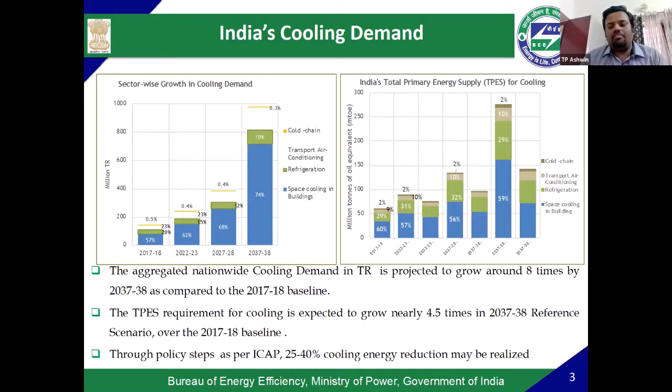And if we take suitable policy steps and effective steps, we could decarbonize this cooling sector and reduce the cooling energy by 25 to 40%. And this is exactly what the Bureau of Energy Efficiency is trying to do for the last 19 years after its inception.

We have always heard there are energy savings, carbon emissions are reduced because of sustainable, efficient and climate friendly cooling, but there are various social impacts and benefits of efficient cooling as well. Like giving cooling access to the most vulnerable, the urban poor and the rural poor of India.

They will be affected severely by droughts and severe heat in the coming seasons. Deaths due to severe heat are increasing like anything in India. So sustainable and efficient cooling will give cooling access to the most vulnerable in the most affordable way. This is our goal, and we hope to achieve it.

Energy and monetary savings are also there through the air conditioner program only. Through the energy performance program of air conditioners only, we were able to save energy by 2018. And in terms of carbon emissions, we mitigated around 60 million tons of carbon dioxide, and increased the well-being of people.

There is a report by the Indian Institute showing an increase of at least 12% if thermal comfort, optimum thermal comfort, is given. Optimal thermal comfort means neither too high nor too low, but the effective level which makes you comfortable enough to do your work and increase your efficiency.

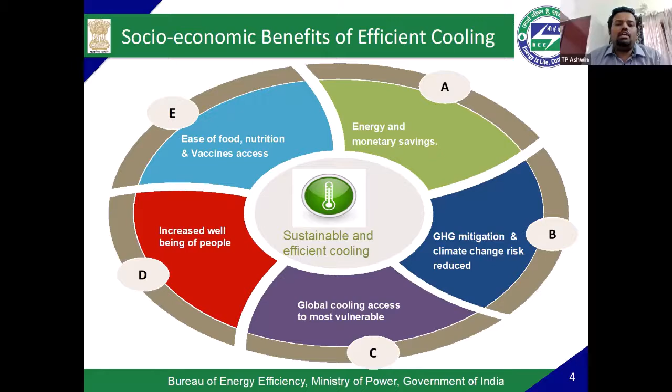So we just saw how much cooling demand is increasing and what are the benefits of cooling. So, to give sustainable, efficient and climate friendly cooling to all, India has taken several steps in providing the same. The India Cooling Action Plan, like the Green Cooling Action Plan of China, is a 20-year vision document which gives a policy that projects how much cooling demand is going to grow.

We understood the problem through this — how much cooling demand is going to increase, and we now know what the cooling demand is going to be. And for solving that problem, the India Cooling Action Plan, ICAP, has listed several policy steps to counter this problem and how to effectively reduce the cooling demand by 25 to 40%.

And ECBC, the Energy Conservation Building Code, is also one of the documents of the Bureau of Energy Efficiency, in which commercial and residential buildings are designed so that optimum cooling is achieved in the most energy efficient way.

Global Cooling Prize, as you might have heard, was launched in November 2018. The finalists will be awarded $2 million to develop a prototype for an air conditioner which has 5 times less impact on the climate, 4 times more efficient than the standard AC available in the market, and only twice the normal price of a 1.5 ton AC. This provided a huge impetus and boost for R&D, and we now have 8 finalists competing.

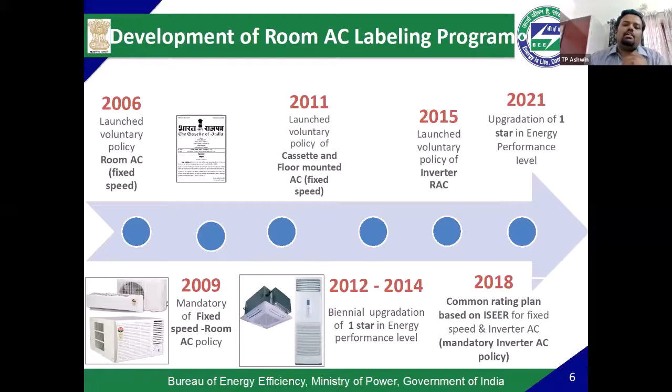This is just a gist of what I was saying. You can see we started India's journey of air conditioner labeling at 1 star of 2.3. Now, following the second last column, the 5 star of 2009 at 3.1 has become the 1 star of our current table — the 5 star, which was the most efficient 10 years ago, has become the least efficient in the present table, from 2018 to June 2021.

Next year we will upgrade this one more, and our MEPS, that is 1 star, will become 3.3, and our 5 star will become 5.

The first table is of split air conditioners in unitary. Because of size constraints, much upgradation hasn't happened there. You can see the table below — we periodically, mostly every 2 years, make revisions in our air conditioner program, so as to make it more energy efficient, so that consumers may opt for more energy efficient items, and manufacturers can also offer them at a more affordable and competitive price.

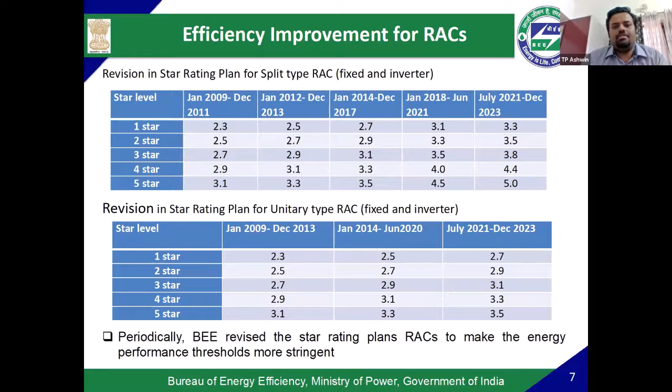In 2015, there was only a little market, but we thought the potential of inverter AC was huge, and we made a program based on ISEER methodology for inverter AC at the start.

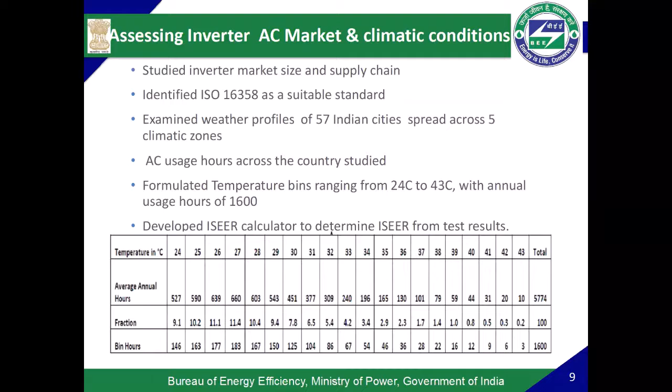Now the next challenge for us was to develop the star rating tiers - that is 1, 2, 3, 4, 5. For that, we took 4 samples from 4 manufacturers and tested it in 3 labs.

Also, as this is an inverter AC, we had to test it at multiple load settings. We can test it at multiple load settings also, but we tested it at 50%, and we calculated the ISEER through the ISEER tool, and we saw the results, and accordingly we developed the ISEER table for 1, 2, 3, 4, 5 star, and ISEER methodology was launched in 2015.

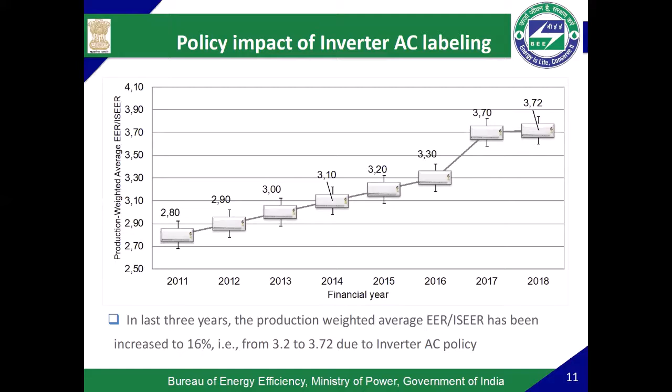That was because in 2015 we launched the ISEER program, and because of the ISEER program there was a huge increase, and the weighted average increased a lot.

You can see here, the red ones are the unitary air conditioners. It shows how much the increase in energy efficiency took place with respect to 1 to 5 star levels. In 5 star, in split air conditioners, 61% jump was noticed from the 2009 table and 2020 table. Similarly, in 1 star, 43% - that is MEPS increased by 43% in 1 star.

74 billion units of electricity savings was done, and 60 million tons of carbon dioxide emissions were mitigated by 2018 only due to this air conditioner labeling program. And through the air conditioner labeling program, 10% of the INDC targets can also be met. This was launched in one of the TERI and NRDC reports, I think.

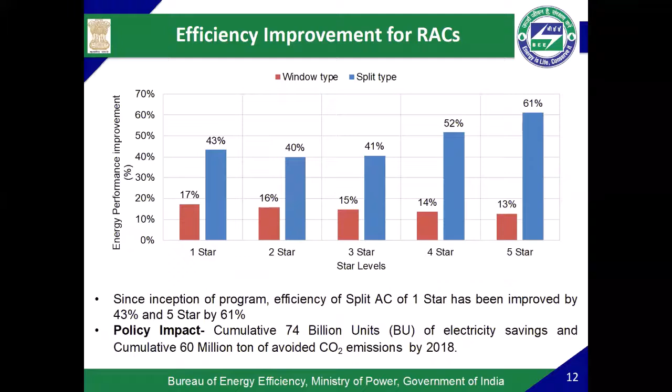The key takeaways are: what are the advantages of the ISEER program? ISEER program gave us a single energy performance index for different climatic conditions, and it also considered the AC usage hours. ISEER methodology led us to develop a technology agnostic program for both fixed and variable ACs, because there is a single star rating table for both fixed and inverter ACs. There is no differentiation. ISEER also pushed the market towards more energy efficient ACs.

The inverter ACs increased from 4% in 2015 to 54% in 2018. It also provides a benchmarking for comparing with other countries, because other countries like Korea, China, and I think Brazil also may be using the ISEER methodology or similar methodology. So we can compare and see where we stand, because benchmarking is most important, so that we should know what the ceiling level is for us, so that we could attain that.

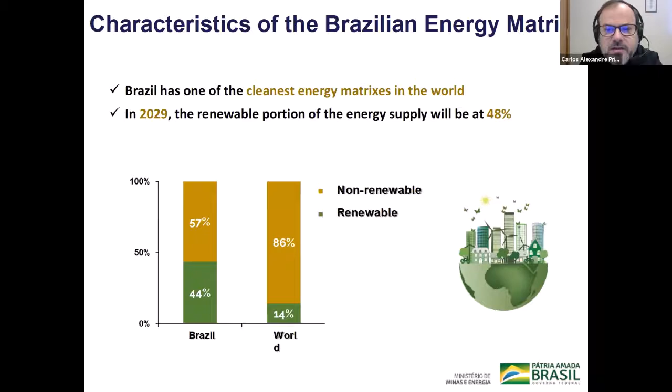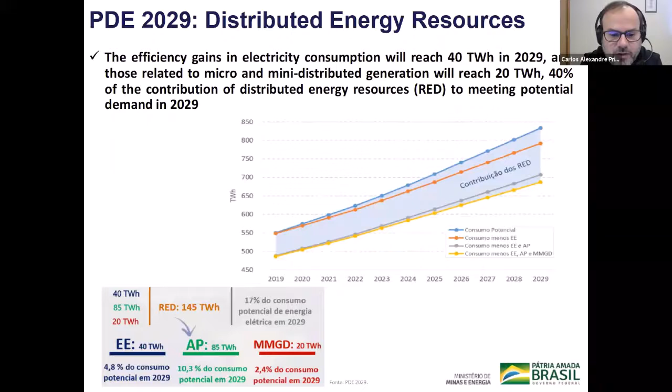In terms of our national plan, we expect to reach in 2029 something around 40 terawatt hours of energy efficiency, which means around 5% of the potential consumption in 2029.

In terms of energy efficiency policies in our country, our first program dates back to 1984, which is the labeling program. One year later, we launched the Procel program, the National Program for Electricity Conservation, which has several sub-programs, including Procel Seal, which I'm going to explain later.

Another important milestone was in the year 2000, when we launched a law regulating that 0.5% of the net operating revenue of distribution companies must be invested in energy efficiency. In 2001, we published the National Energy Efficiency Law, defining the establishment of minimum standards for appliances and equipment. In 2011, we launched the National Plan for Energy Efficiency, a set of directives which we are revisiting now, and I'm going to talk about it later. And in 2016, another law was approved, giving Procel enough funding for annual resource application plans.

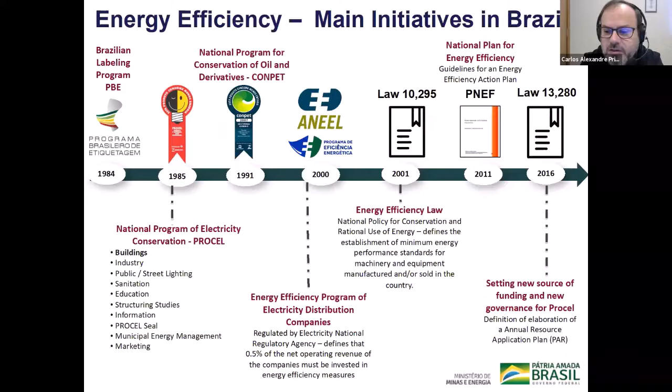Regarding the energy efficiency law, launched in 2001, it established the national policy for conservation and rational use of energy, assigning the executive power, meaning the Ministry of Mines and Energy, the establishment of minimum standards in our country. It is also regulated by decrees, and in 2019 it was reviewed, establishing a steering committee on energy efficiency indicators and levels, CGIEE, which I chair at the moment.

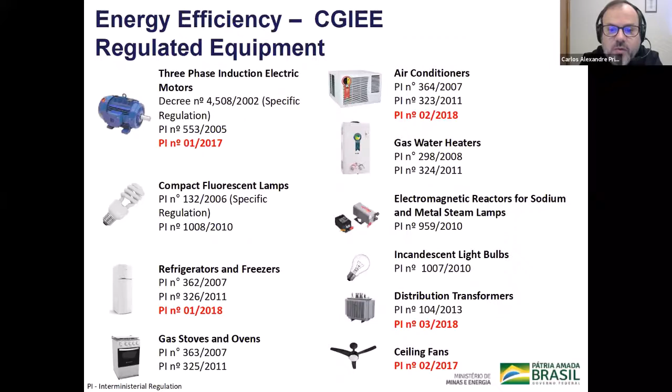Something important to mention is that every single regulation - as you can see, we have 10 different appliances regulated - each of them has to be studied. There is a study of impacts and also a public consultation regarding the minimum standards, so that manufacturers and society in general can give their opinion on how restrictive the schedules, deadlines, and minimum standards can be in terms of feasible public policy.

In 2018, we reviewed our minimum standards for air conditioners, establishing a minimum of 3.02 watts per watt for split air conditioners. For window type units, this table shows all the categories.

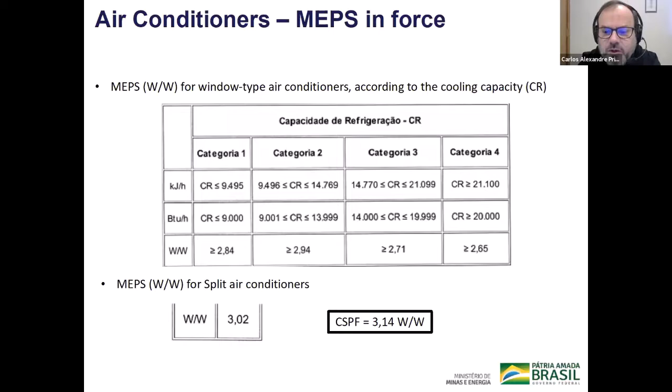The problem is that since 2007 we haven't had any revision of these minimum standards, for many reasons. We had some problems with industry, some problems with tax reductions applied only for A-class air conditioners, and also some problems with the methodology for testing air conditioners. But I'm going to let my colleague from Inmetro present that after me.

In 2019, we established new standards, or better, we studied new standards for air conditioners. One of the strategies would be to review the standard we had recently established in 2018.

But after some discussions, we understood that it would be more interesting for society and for manufacturers to establish new energy efficiency classes from A to F, and keep the minimum standards in class F for energy efficiency for 2023.

At first, we wanted to start the mandatory action in 2021, but we understood that because of the lack of methodology for testing inverters, it would be better to postpone to 2023, the beginning of 2023.

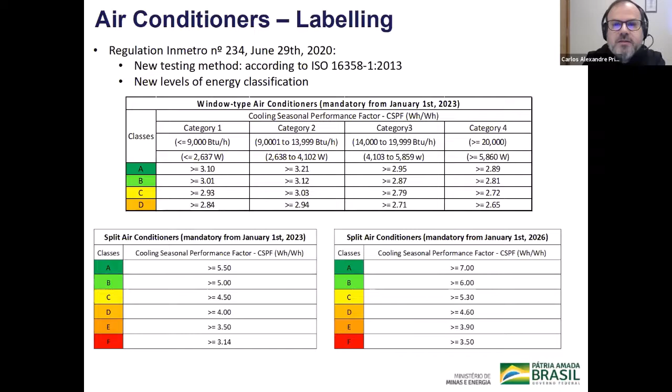To do that, with crucial help from Instituto Clima e Sociedade and CLASP, we could understand the direct effects and impacts of this policy of establishing MEPS and new standards for classes in the labeling program. We could see that the direct impact would be something around 10 gigawatts of avoided generation capacity in 2035. This represents something around 30% of the national determined contribution for the electricity sector in our country, which is part of our Paris Agreement commitment.

We also studied and found out that 38 terawatt-hours of energy could be saved in 2035, in cumulative numbers.

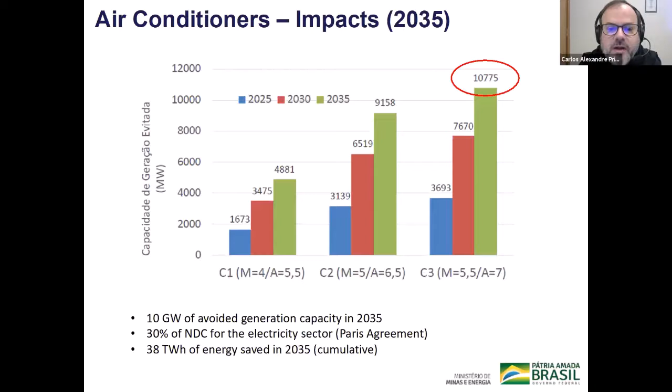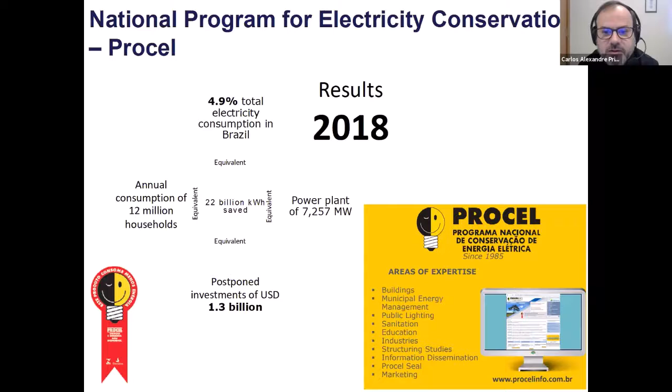Procel, as an endorsement label, plays a very important role in market transformation because it shows manufacturers what we intend to be, our goal in terms of energy efficiency for the future. So far, the Procel seal is given for those appliances that are in the A class of the labeling program.

In the near future, we are planning to change the strategy a little bit so that the Procel endorsement label can represent a mix of strategies, at the same time an endorsement label, but also something like the Top Runner program in Japan. This means that for some time we can have very few appliances with the Procel seal, aiming that the rest of the market can reach the same level of energy efficiency in the future.

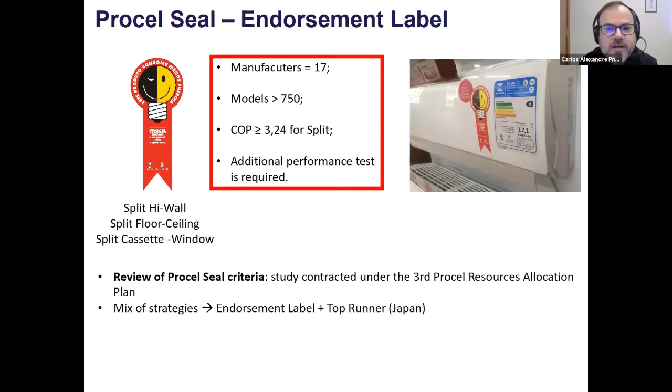Procel, the national program, MEPS, and the labeling program work together because all the other expertise areas of Procel have to take advantage of these energy efficiency labels and endorsements to accomplish the other programs. For example, in Procel we have energy efficiency for buildings that uses the air conditioner label, the labeling program for buildings too, and so on and so forth. The dissemination of ISO 50001 also uses the label to implement activities and actions for energy efficiency, retrofits, etc.

The other two important actions I should emphasize at this moment are improving the methodology for monitoring the results obtained with energy efficiency actions. This is very important for us now, especially considering the new standard for air conditioners and the following strategy for refrigerators and other appliances, like air conditioners for commercial use, for example.

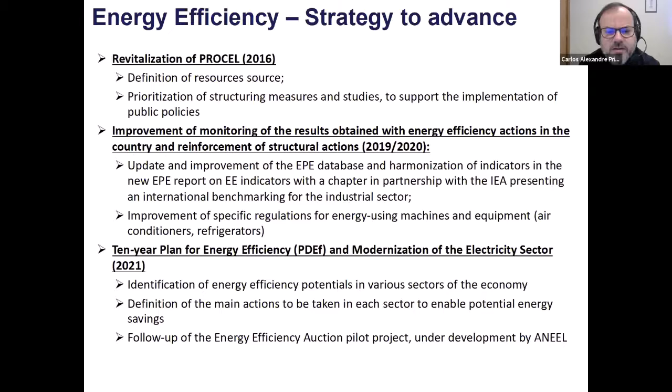I think this is the last slide. So I'd like to thank you very much for your attention and give the word to my colleague from Inmetro.

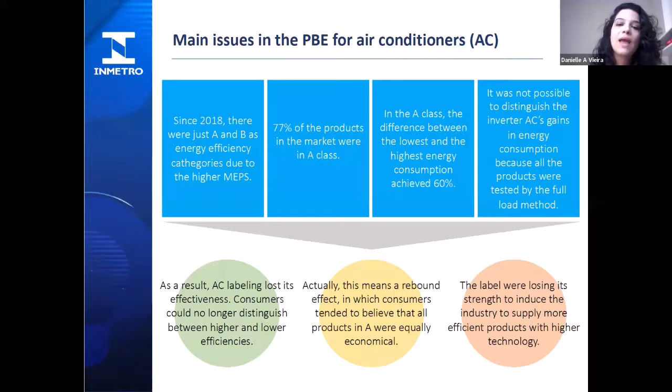The label was losing its strength to induce industry to supply more efficient products with higher technology. So, please next. We needed to change all that, but we also faced some challenges.

First of them was getting good information. The way we overcame it was the cooperation with CLASP, iCS, and all the Kigali network. This cooperation was crucial for Inmetro to frame the problem and learn about international trends and best practice.

Another challenge was defining the test method and its parameters. So we counted on the National Electric Energy Conservation Program, Procel, in Brazil. Procel conducted a study on the partial load method and seasonal metrics, which helped Inmetro select ISO 16358 Part 1 and define the temperature set for the tests.

Besides, this study determined the specific Brazilian bin numbers based on the 2019 survey on electrical appliance use and possessions, also run by Procel.

Another challenge was rescaling the label in CSPF. So how to rescale the label if all our measures and all our database were in EER? Inspired by the Indian experience, Inmetro coordinated a task force with the industry.

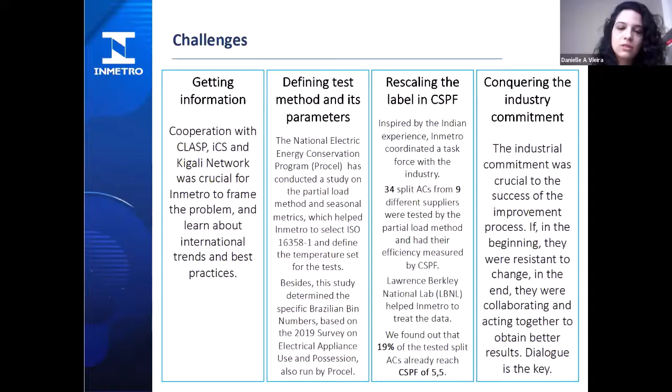And the last but not least challenge was conquering industry commitment. Industrial commitment was crucial to the success of the improvement process. If in the beginning they were resistant to change, in the end they were collaborating and acting together to obtain better results. And dialogue is always the key.

So we made some advances. How was it and how will it be? The scope didn't change at all. The labeling program in Brazil covers window air conditioners and split system types—floor ceiling, cassette, and high wall—with cooling capacity up to 60,000 BTU per hour, and it remains the same.

The labeling levels changed a lot. So I brought here the advances regarding the split units. Our A level was at 3.23 EER, and it switched to 5.5 by 2022.

And there will be another target. There is another target for 2025, which is 7 CSPF for the new A level.

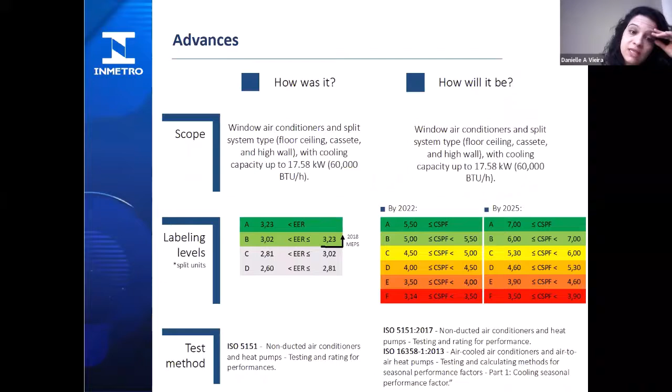The test method has changed also. So we tested on full load only, and now we will test on partial load, and the metric will be seasonal according to the ISO 16358 part 1.

So we do have some phases of implementation. The new criteria were published in July of this year. There is a deadline for suppliers to adopt the new label, which is the very end of December 2022. The retailers also have their deadline, so they have to sell ACs just with the new label from June of 2024.

So we call this period the transition period, where it will be possible to find products on the market with the old and also with the new label. But after June of 2024, the new label will be totally implemented. But also there is the new target for 2025.

We set the new A at 7 CSPF. So we also will have some deadlines for that. And from June of 2027, the higher level criteria will be totally implemented. So please, next.

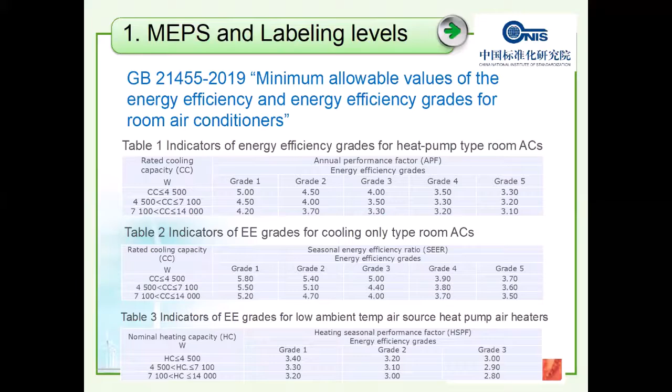Instead, we included three types of air cons in this standard: heat pump room air cons, cooling only room air cons, and also a new type, the low ambient temperature air source heat pump air heaters. So now in these MEPS, we have the energy efficiency grades for these three types of air cons. For the heat pump type and cooling only types, we have 5 grades, and for the heat pump air heaters, we have 3 grades. In all of them, grade 1 is the most efficient one. So I would say after this revision, our Chinese MEPS reached the same level as other advanced international standards like the European, US, Japan, and all the others. So we are very proud of that. Next, please.

For the energy labeling, we established the energy labeling program in 2005. After that, almost every time we revise our standards, we revise the labeling too. So after we updated our standard, we updated our labeling. In the past 5 years, we made great changes to our labeling.

The biggest change is we have included a QR code into our labeling. It's a very great change, because when we included this QR code, stakeholders and customers can simply scan the QR code and get the information they want, plus much more additional information, like repair and maintenance information, product manuals, and many other details. It makes everything very convenient.

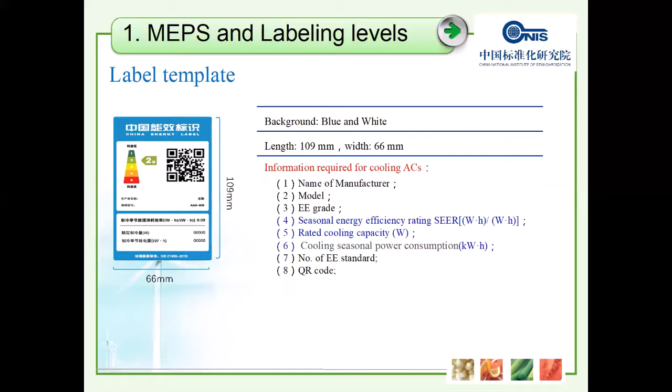During these revisions, when we updated the standards, what we wanted from this revision is to phase out the fixed speed aircons. So after merging the 2 standards for fixed speed and variable speed units, we made big changes to the efficiency metrics, from EER for fixed speed aircons to APF.

Theoretically, the only way to make this change is to test and measure the fixed speed aircon following the APF method, then calculate the corresponding APF values from EER values. It's very complicated mathematically, so a problem comes out.

There are multiple corresponding APF values to one EER value, rather than a 1-to-1 match, as shown in this example. For the given unit, the EER value is 5.6, but the APF is in a value range from 4.48 to 5.04. So we should choose the single value for APF through further market survey, testing, and analysis.

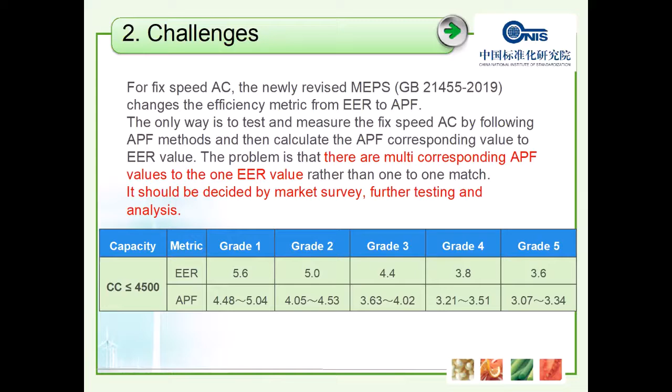Stakeholder involvement: since we developed and released our standards 30 years ago, we have had great stakeholder involvement throughout the whole development process of our standards and labeling. There are many great brands in the aircon industry involved.

Gree, Midea, Haier, Changhong - all of them are great Chinese brands, and we also have other international corporations with manufacturers located in China, like Sanyo, Mitsubishi, Panasonic, and Daikin. We have included almost all the important manufacturers in the development process.

Every time we want to update our standard, first we form a drafting team, and at this step almost all stakeholders, including manufacturers, become members of this drafting team, so they are part of the whole process from the very beginning to the end of standard development. They take part in the research, the comment collection, and the market survey - they're involved in the whole process.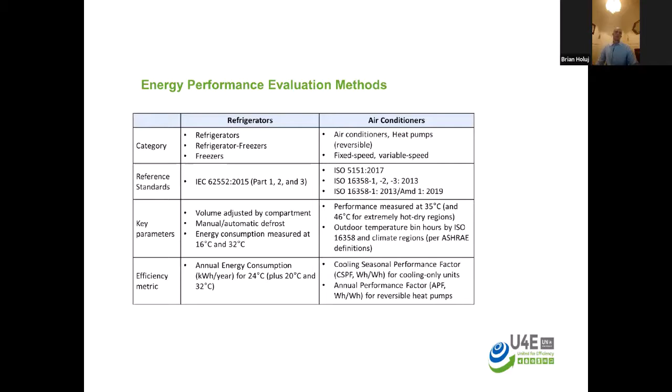One of the things we wanted to do was look not only at where markets are today or what are existing policies, but really where do we see markets headed. This is on both the technology side—questions had come in earlier today about R290 air conditioner units, how many are out there, and what we can do in terms of promoting certain types of technological advancements while remaining technology neutral.

We looked at a lot of major economies, and where we landed on the air conditioner side is very close to China's progression, with the currently confirmed enhancements to China's MEPS underway and anticipated future revisions to follow. So we took an outward look over the coming years to see where the major markets are headed, because the real philosophy is that for many economies around the world, they're technology receivers—they're going to be importing much of these products. If you can tap into the economies of scale being created by China, India, Brazil, and EU type market interventions, and peg to something similar, you can hopefully benefit from those same economies of scale and get some of the better, more efficient products that are out there.

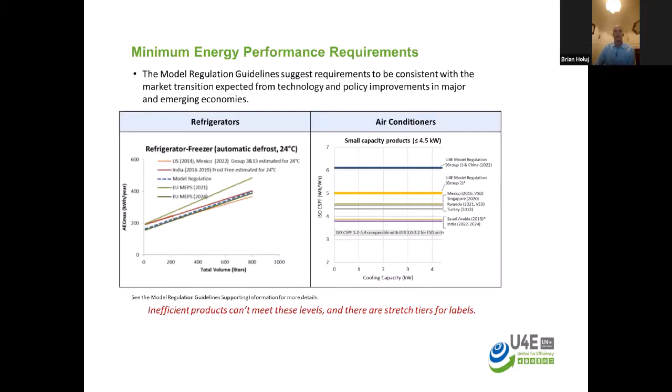A lot of the reactions we get in countries where we work is they don't want to be dumping grounds for products that can't be sold elsewhere. Many countries are setting these kinds of regulations and incentives, and we wanted to tap into that momentum and provide a snapshot of what's going on in the world. A lot of this is captured in our underlying document called the supporting information document, which gets into the technologies and the policies. From that, we developed the model regulations—you'll see a few documents that lay out the rationale and then what we recommend.

So in terms of the types of information that should be listed on a product, we try to capture key categories that you'd often see in legislation in a country when they're looking to regulate these kinds of products. But it could also be used for incentive schemes, voluntary type programs. So we just looked at general best practices. These are meant to be a starting point. Of course, any country would have to adapt such content for its own use.

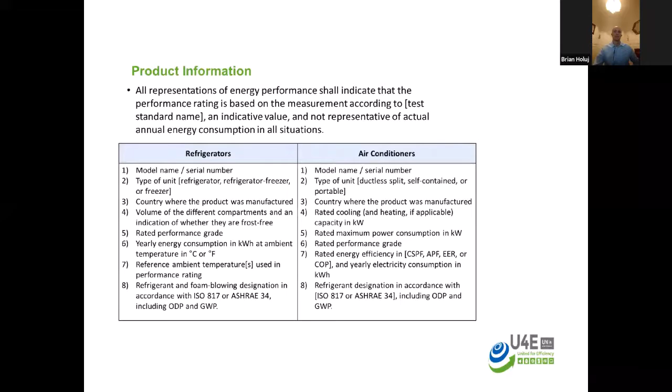This is an important issue here on refrigerants. The issue comes up multiple times, and in the course of discussion, the Kigali Amendment to the Montreal Protocol is driving a global transition on the refrigerant gases used in vapor compression systems. We wanted to tap into that, bringing together the environmental ministries and the folks dealing with refrigerants, as well as the energy efficiency community trying to drive greater energy efficiency. How do you bring those two elements of refrigerant transition together with energy efficiency improvements?

What you'll see recommended here are different levels we've suggested as upper limits on the global warming potential of refrigerants. We remain essentially technology neutral, but did try to put in some common playing field that could be applied. The other aspect is that we were really looking at around a 2023 implementation timeframe. This staggers a bit behind what you'll see, say, China do on its efficiency policies, to allow a little time for those products to be available widespread for export elsewhere.

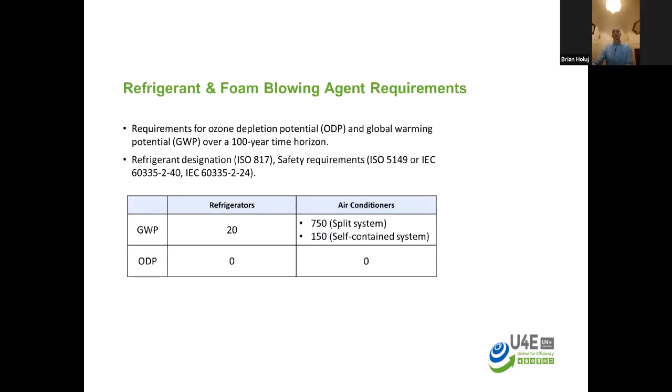I'm on my last one, so should be good timing wise. I'm down to 1 minute left. In terms of deployment, these have been getting rolled out significantly around the world, and with partners like CLASP and many other organizations, the World Bank has been referencing these as a potential basis for financing and technical assistance they provide. We work in over 40 countries, and we're using these as a basis for MEPS and labeling recommendations, government procurement schemes, and other things like that.

Thank you for your time, and thank you so much to CLASP and the other speakers for this opportunity.